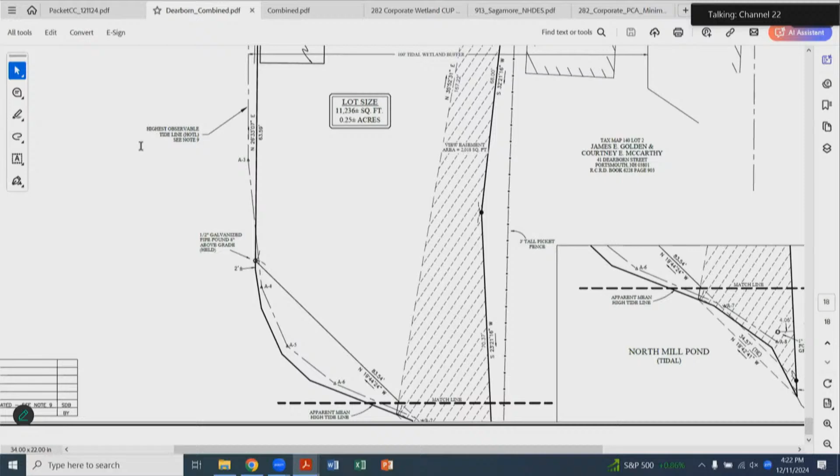The alteration of the natural vegetative state or managed woodland will only occur to the extent necessary to achieve construction goals. We're not proposing any alteration to the natural vegetative state. There won't be any tree cutting.

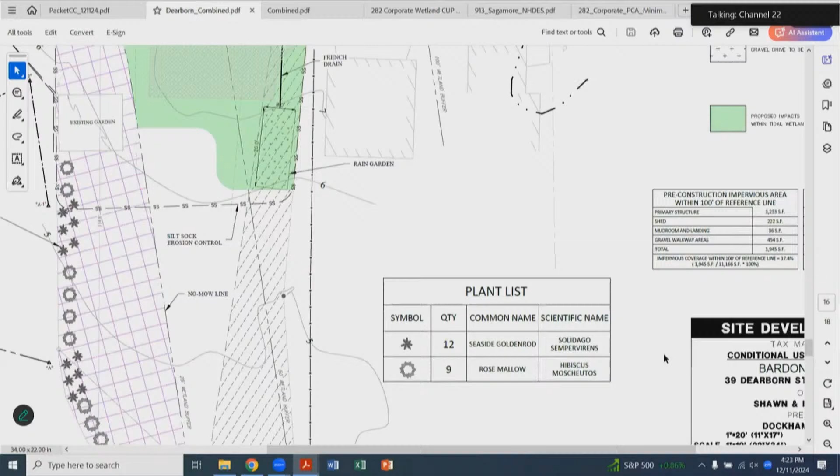And we also, from the last meeting, plan to increase the width of the natural vegetated buffer adjacent to the resource. So the property owner has been amenable to providing a no-mow zone in the 25-foot setback to ensure that native vegetation can grow back and provide some sort of buffer from both stormwater and on the lot. And then this proposal is the alternative with the least adverse impacts to areas and environments under jurisdiction of this section.

This project is the least impacting practical alternative, and we are trying to make the property better environmentally, while also allowing the property owner to add this addition on to enjoy his property. Any area within the vegetated buffer strip will be returned to a natural state to the extent feasible.

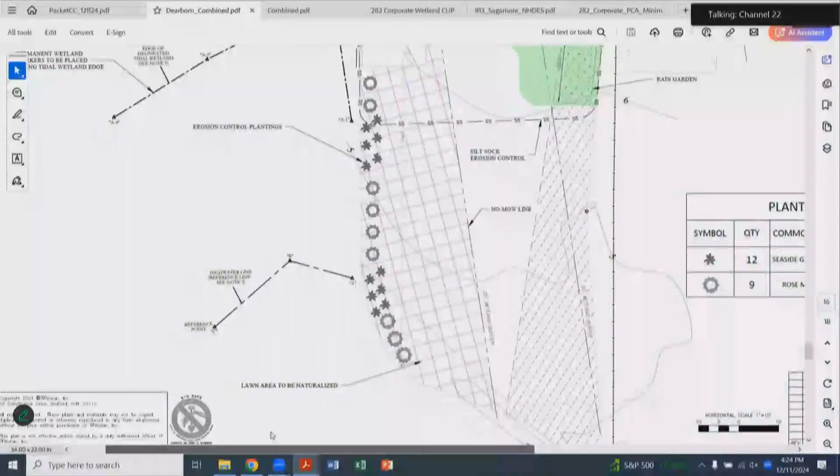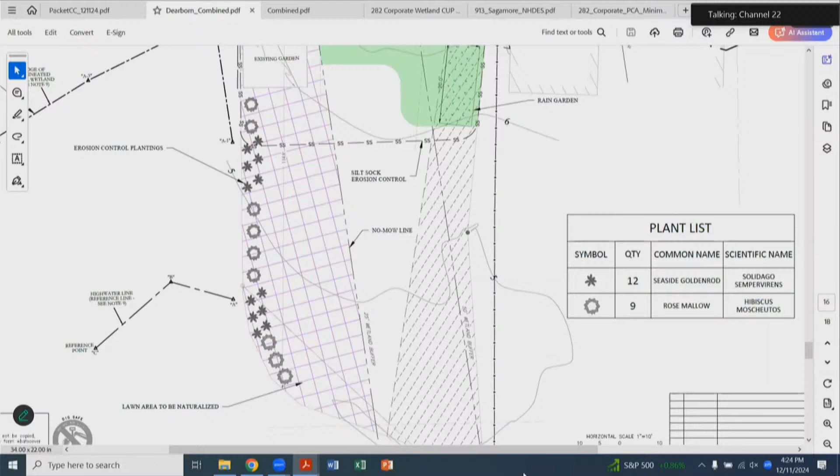So impacted areas within the vegetated buffer strip will be reseeded with a native conservation seed mix, and the area currently existing as lawn, as I mentioned before, will be allowed to return, as well as these plantings on the plan that we are proposing to facilitate an expedited regrowth of that natural buffer area. And I am happy to answer any questions that you may have on the project.

Great, thank you very much. Questions from the commissioners? I can start. The pervious turf stone, I think it said it was a cement grid, so just to confirm, there's no plastic with that whole setup? No, there's no plastic underneath or anything. We're able to do that just by laying it right on the grade. Okay, and the grid is the concrete grid? Yep. Great, thank you.

Another question? We may have covered this before, but the area to the left of the house, existing building, has, I think it was maybe plastic that was put down, or because of the runoff from the roof? Yes, I remember that from the site walk. I'm not sure if that has been removed at this point in time, but I can double check with the property owner and make sure that that is removed as a condition of this. Okay, thank you.

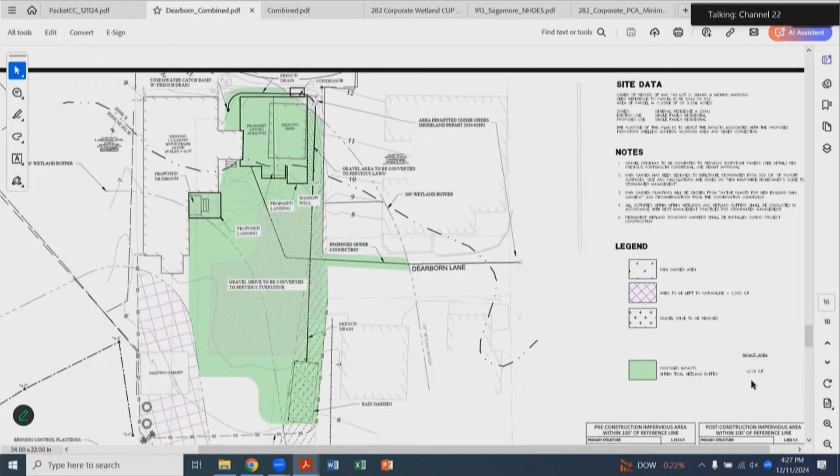So the increase in impervious area from the home addition will be about 460 square feet. So we ensured that this rain garden would be able to infiltrate that amount that is added on by having this home addition. But it won't capture all of the water that would run off of the roof, just that extra square footage? Yes, basically the extra square footage, and where the catch basin is located on the back of the property will also capture some from the existing home.

And then converting the driveway to be those pervious turf stones will also aid in some of the sheet flow, just as a result of runoff on the property, as well as allowing the buffer strip to revegetate, prevent some of those pollutants from entering the resource.

Okay. So you don't actually know quite where the water table is, or how quickly it would percolate there naturally at this point. Did I hear that correctly? Yeah, not how fast it would percolate, but we made sure that, especially on the detail, it shows that we would dig out a little extra in order to put an engineered soil mix that will have better drainage than the clay that we planned for.

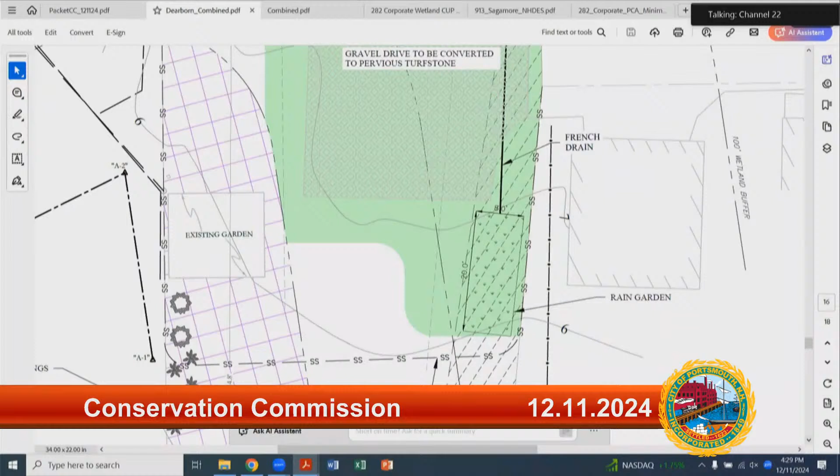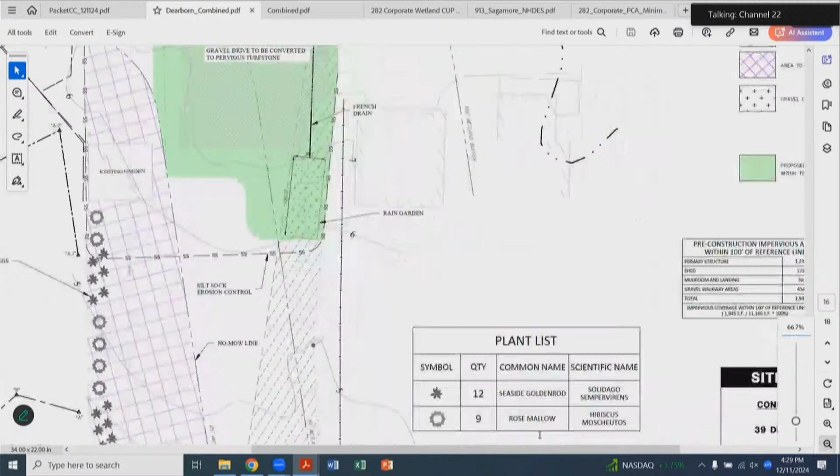Okay. And there's no overflow for that rain garden? It'll just kind of go into the lawn area if it overtops? Yeah, so on the rain garden detail, on the southern end of the property here, there will be a slight little dip in the berm acting as an outflow structure. So if it fills up and can't infiltrate for a very heavy storm, then it will be just flowing into the

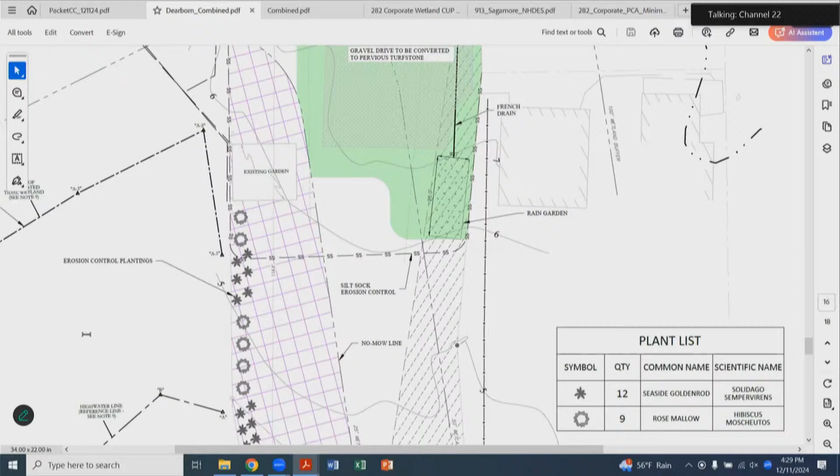lawn area. Okay. So there's a little bit of a lip around it? Yep. It will essentially just be a depression in the ground that's dug out, and then plantings. There's a great guide online about rain garden plantings, and we're happy to take recommendations as well if the commission has any for the rain garden, and they'll be planted in this depression. Water will flow in from either runoff or the French drain and just percolate down in the soil.

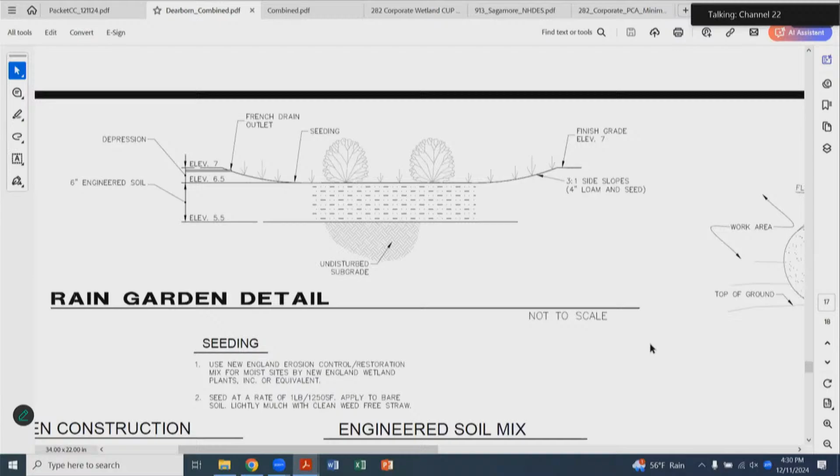If it is a really heavy storm, like I said, on the other end, there will be a slight little outlet depression in the berm, which will allow it to outflow, so it doesn't flood and completely rip up the rain garden. Yep, it'll go in the right direction too, away from the house and driveway. Okay. In terms of plantings, the only thing I might offer is to think about plants that have a little bit of salt tolerance. It could get a little brackish over time. Absolutely.

To piggyback on the plantings, the plan that we had in our packet versus this plan that you gave us, you changed the 25-foot wetland buffer line to have it wrap around, instead of the one in our packet that just went straight down. Are you also going to make the plantings go around the curve there? Because before they were along the entire stretch of wetland buffer on the edge, but now that you've extended that and curved it around, are we going to continue those plantings? Yeah, that's something that we can definitely consider.

I did want to mention as well, the reason that those buffer areas look slightly shifted on the plan that I handed out today was because the land surveyor we've been working with reached out to me recently when I requested a stamped wetland plan, per the last meeting. The commission wanted to see a wetland stamp and the date of delineation. The surveyor said the plan I'd been working with since September was actually the wrong line, so he sent an updated version which caused the shift in the buffer areas. The project remained largely the same, just shifted slightly based on the most current delineation.

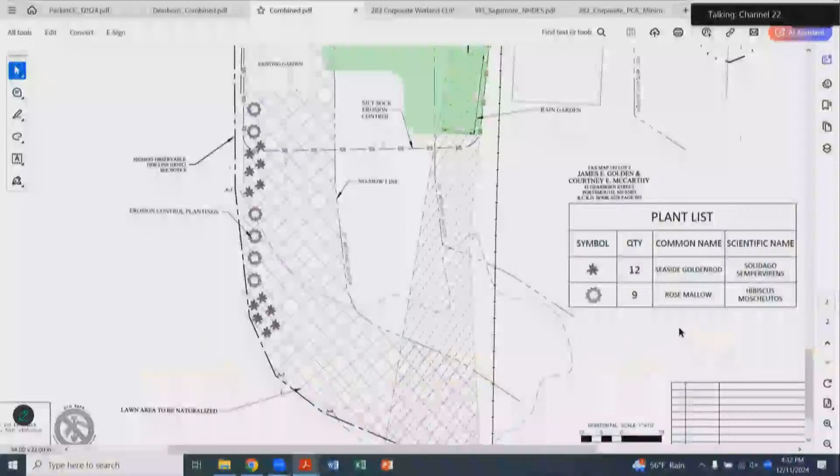Great, thank you. So the number of plantings remains the same? Well, that was something that we had agreed with the property owner on, but that's subject to change. I'm sure he'd be willing to add more plantings and develop a more extensive living shoreline plan. Yeah, on the original plan, the 9 hibiscus were shown, and they're not. So I'm just making sure that the number of plants remains the same. Yes, the number of plants is remaining the same.

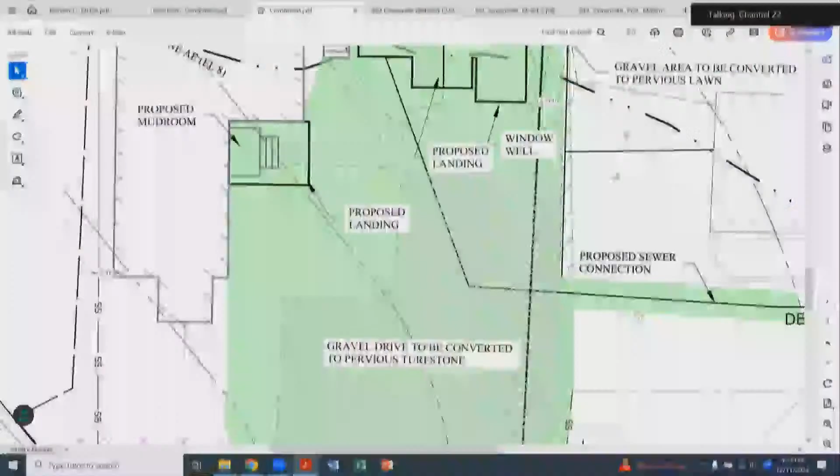Question about the French drain. It looks like the base for the driveway intersects the gravel for the French drain. Could you describe whether or not that's an issue? The base, sorry, could you explain that again? It looks like the area of the driveway overlaps the line of the French drain, and there's compacted base below that material you're using on the driveway. So I wondered if that has an impact on the French drain. Yeah, the French drain will be installed before the driveway is converted to pervious, so it'll run underneath the turf stone pavers.

I guess my question is that there's some amount of compacted base that runs over. It looks like they would intersect, and it's two different materials with different drainage. Oh, okay, I see what you're saying. So that area that will intersect the French drain, we can determine how deep that goes on the detail. The depth can vary, and we can ensure that those areas don't interact.

Okay. The reason for the question was, would you be creating some kind of stop in the flow there with the compacted base? But it doesn't sound like it. Yeah, no, we would make sure that it is able to work efficiently and not impede the ability to shuttle that stormwater into the rain garden. Okay, thanks.

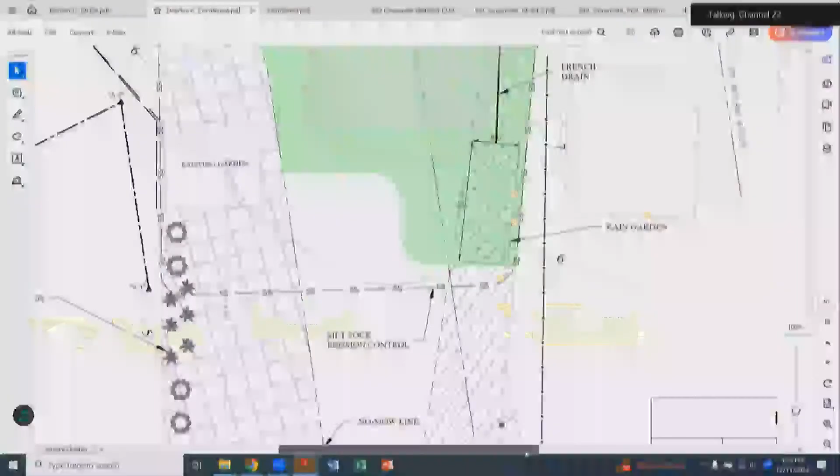Question about your silt sock placement. Yep. It looks like it cuts right across the property, going right into the 25-foot buffer, and I was wondering if it could just hug the 25-foot buffer. It shows that it's going right across, but instead could it go up and protect that 25-foot buffer above it? Yeah, absolutely. We can definitely make that edit to make sure that it protects the whole 25-foot buffer. Okay, thank you.

Then I had one or two more questions. What's the elevation of the basement for the new structure? Or is there going to be a basement? I believe there will be a basement. I believe I added the architectural plans. I'm not sure that this has an elevation on it, but is this for the building permit for the FEMA flood zone?

Well, yeah, and if it doesn't meet what it needs to, and you have to change the plans, that could potentially impact what you have to do and what we have purview over, so that's why I was asking. I am not entirely sure on the elevation of the new basement. I can reach out to the contractor and make sure. It has to be, is it 10 feet? Yep, eight plus two. Base flood elevation there is 8 feet, so any ground floor would have to start at 10 feet.

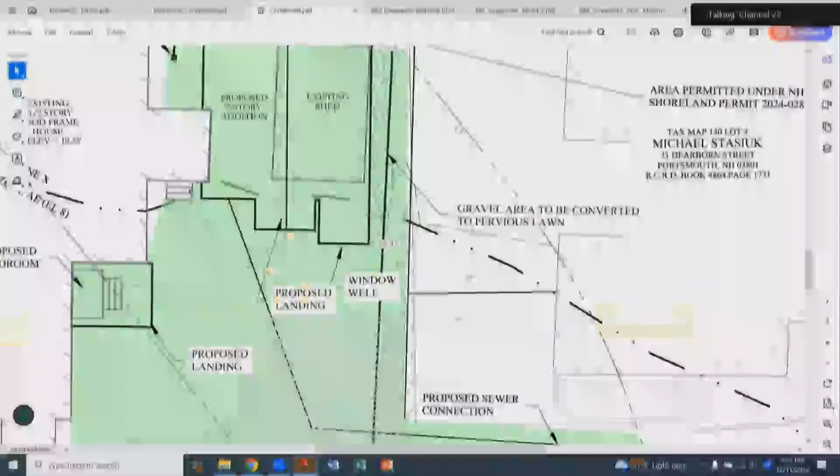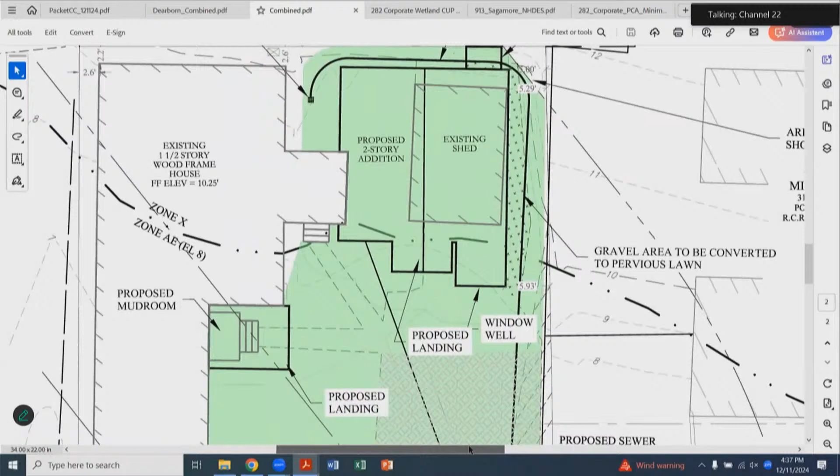I actually just saw in the plans that there were some elevations or topo drawn in here. So it looks like it's really close to 10 feet at ground level right there where the addition's going in, but if a basement is gonna be dug below that, that would come up against the floodplain ordinance for Portsmouth, so there would be some tricky issues with what could go in that basement or if the basement could be built at all. And that is for flood zone AE. Yes, I think that's A, or that's X. So from this survey, I guess the foundation would be mostly in flood zone X.

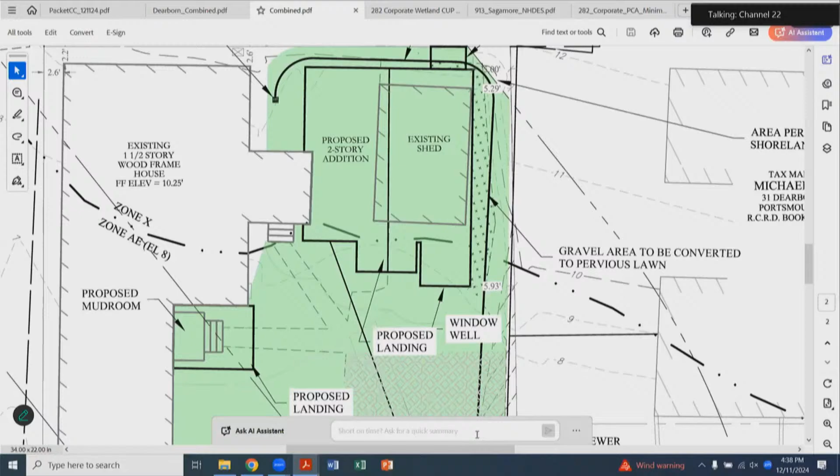There was a discussion about it in the first meeting or at the actual site, because there were comments about sump pumps going on permanently and not managing to empty the water. Yeah, I think our big concern is just that before you get any final planning board approvals, you have the final design figured out and you've talked with staff to determine what the elevation has to be at. Because if it turns out that you'll need to redesign the whole basement or get rid of it, you might have to go back to certain boards to readjust plans. So we don't want you to have to go back all the way to the beginning.

One more question. Do you have where you're planning to put the buffer boundary markers anywhere on your plans? I added a note that said that the wetland boundary markers will be added, I think just where the delineation occurred. The 25-foot buffer? It's on the wetland edge right now. Oh, it's on the wetland edge right now? Yeah. For each of the buffers, add markers for those during construction? I mean, how are you going to make sure that the no-mow line stays where it is?

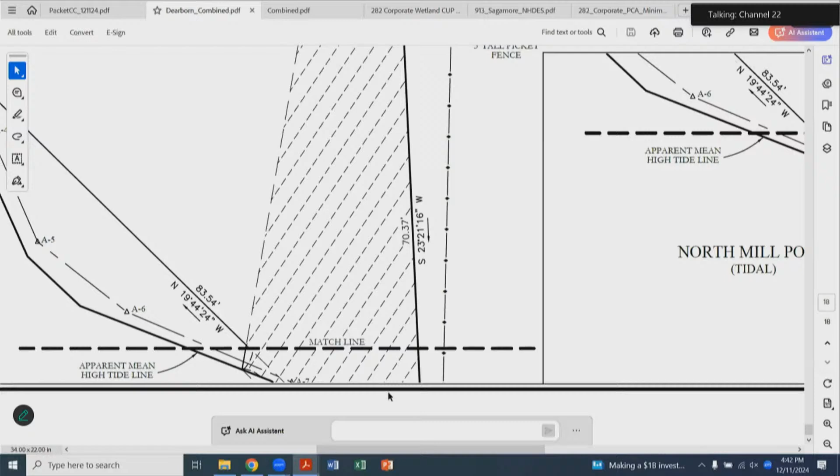Just a question about the view shed, because I'm not that familiar with how those are managed. You don't anticipate any concerns with letting the grass grow tall, maybe even letting a few small bushes grow up in that buffer that also overlaps with the view shed? Yeah, I think that view easement, I believe on the boundary plan, there's a height set. It's mainly for actual construction, like building a house in there. They got approval for the addition being a certain height, to ensure the abutting property doesn't have to deal with someone putting up a very tall house and then they can't enjoy their property.

Okay. There's also a note on the plan that said it can't be vehicle storage or parking. But it doesn't say anything in the note about woody plants, which is great. Maybe a big tree might be an issue. Right. Makes sense, just to make sure. Are we ready for a motion? Okay. Go ahead, Barbara.

I'll make a recommendation to approve 39 Dearborn Street with some stipulations. I might need help on this, but to remove the plastic, I think on the northwest side of the house, and to provide the basement elevation to meet the Portsmouth floodplain ordinance requirement, and to include it in the planning board application. And to put the wetland buffer boundary markers, possibly in addition to boulders or other markers, at the no-mow line at the 25-foot buffer.

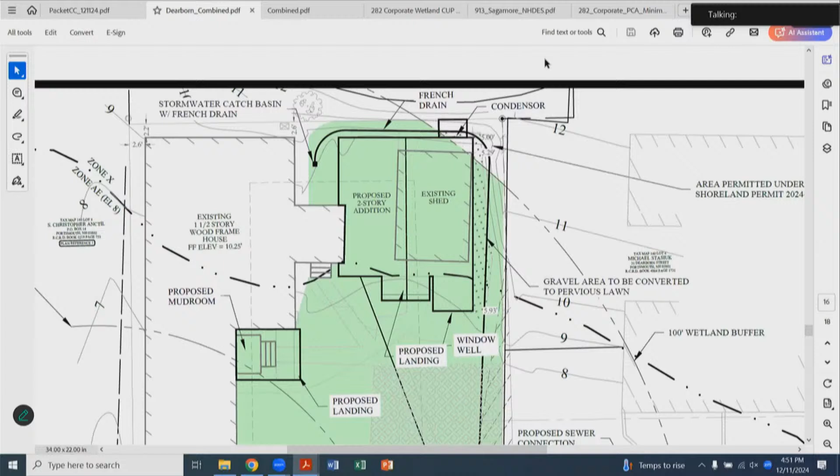So there won't be a basement, because a basement is defined as a space that becomes the new floor elevation. There could be a crawl space, though, and a crawl space is defined as anything that is 4 feet or less from first floor to lower floor. So that is where they might head if they're going to comply. So no basement, potentially a crawl space. Okay. But they could propose to fill in front of the building to create a change to the flood zone line, but that process is another option, and it's not before you.

Okay. Well, there's the FEMA rules and then there's the city's ordinance, which are two separate things, right? Right, we just add on that extra 2 feet. So where it's 8 over there, it'll be 10 feet where the first floor, the ground level, will have to start. And that probably just goes for the new part of the building, not the old part? Right, or a substantial renovation or reconstruction.

If it's more than 40% of the cost of the building, then that's considered a substantial reconstruction or addition. So the addition would have to be above what the existing home already was. But they wouldn't be expected to elevate the older part of the existing home? No. Unless they were doing substantial construction on that portion. New construction has to comply. Renovations have a threshold, like you said, 40% of value. Which this might be, but.

And just to add a note, the footprint closer to the edge of the property where the proposed landing and window well are will not be part of the foundation. So if there were going to be fill, it would just be where that little jut out is of the existing structure, in the areas that we already have denoted as impacts, just where machinery will go in order to construct the addition.

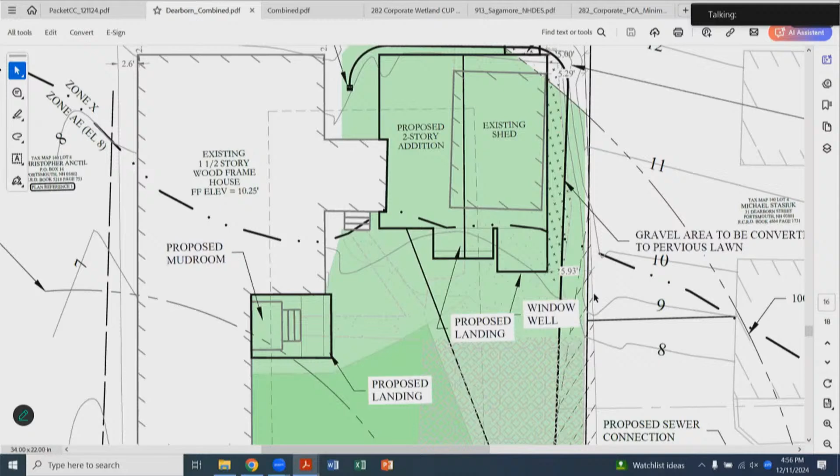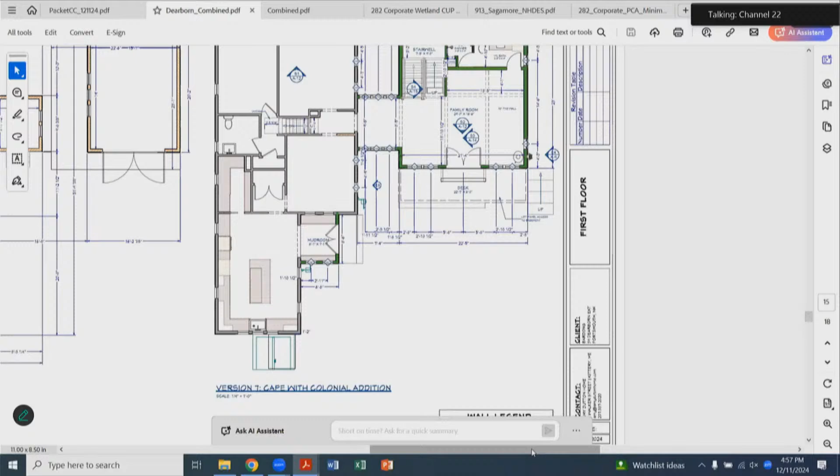So I should have asked this before, but the window well is then indicating that there is a window in the foundation to the basement? Is that correct? Why would you need a window well if there was no window at that level? I think when we were on the site walk, the property owner mentioned that the window well was like a bulkhead. Yeah, I believe on the foundation plan it's shown. That's the first floor plan. There's one that is the foundation plan. Yes, so it is actually a bulkhead.

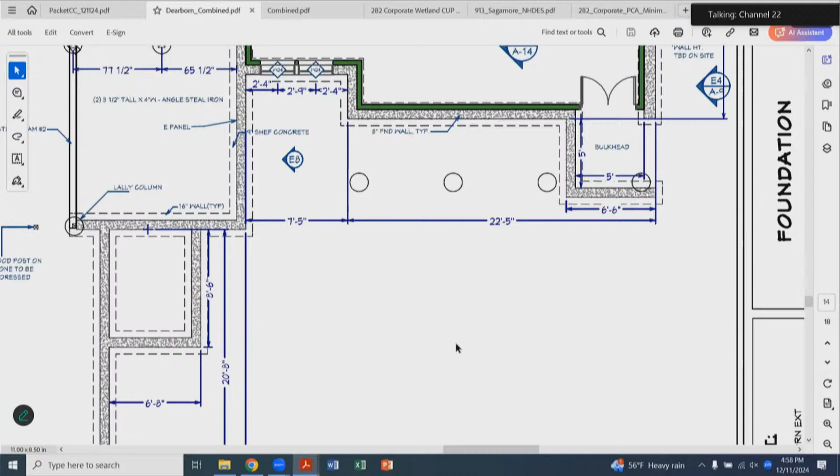Sorry, I misspoke. Just the landing area and the bulkhead will be in that flood zone X or AE, and those areas would be the only areas that would need a bit of fill to make them compliant with the flood zone regulations. So there's going to be a basement, that's showing water table, stairs, and a bulkhead. AE will have to comply with the 10 feet.

So if there is a basement proposed, it would have to not have any utilities, or there are a lot of restrictions on what could be in the basement, but I think that's something we'll solve before the building permit process. It would be good to get that floodplain elevation certificate from FEMA. Yeah. Okay, we have that as a stipulation already with figuring out the elevations. Sure. Okay, are we ready for a motion?

Oops, a vote, I meant a vote. We've already done a motion. And Talia, you're voting. I'm voting. Okay, all in favor? Opposed? Great. Okay. Thank you very much. Thank you.

Next on the agenda, we have the conditional use permit for the Pease wetland at 282 Corporate Drive, and also a state wetland bureau application. Do we need to make a motion to hear them together? I think so, just because they're separated on the agenda. Okay. Does someone want to make a motion to hear those, the conditional use and the state permit together? And I guess we'll vote on them separately, but right in a row. Yeah, I'll make a motion that we examine both those permits together. Second? I'll second. Okay. All in favor?

Okay, great. Hi, thank you, Madam Chair, members of the commission, John Chagnon from Haley Ward, representing Port City Air and Great Circle Catering with this application. The project timeline, just for reference, is that we started in June with a concept approval from Pease Development Authority. In October and November, we worked with the Portsmouth Technical Advisory Committee to perfect the site plan elements and the technical elements of the site plan. And then on December 4th, you folks had a site walk at the site to review the proposals that you have before you. There's two items, a Pease conditional use permit and a wetland bureau minimum impact permit application.

So first I'm going to talk about the wetland conditional use permit. And that conditional use permit, since it is under Pease Development Authority area, it is going to be looked at under their ordinance section in Article 304-A.08, use of the wetlands requiring a conditional use permit. Section 304A.079 does allow drainage ways and stormwater treatment structures to be constructed as allowed in the buffer. This is the Pease rules. But in this particular application, the removal of pavement and concrete pads, removing impervious surfaces out of the buffer, qualifies for the requirement that we obtain a Pease wetland conditional use permit.

So according to Pease Development Authority ordinances, we have 5 criteria to meet. The first is that the land is reasonably suited to the use. We propose that this proposal before you is to remove existing non-conforming site impervious surface improvements and create stormwater treatment enhancements. And given that the existing lot contains an existing commercial site development which has been there for some time, we would submit that the land is reasonably suited to the revised use, given the proposed alterations.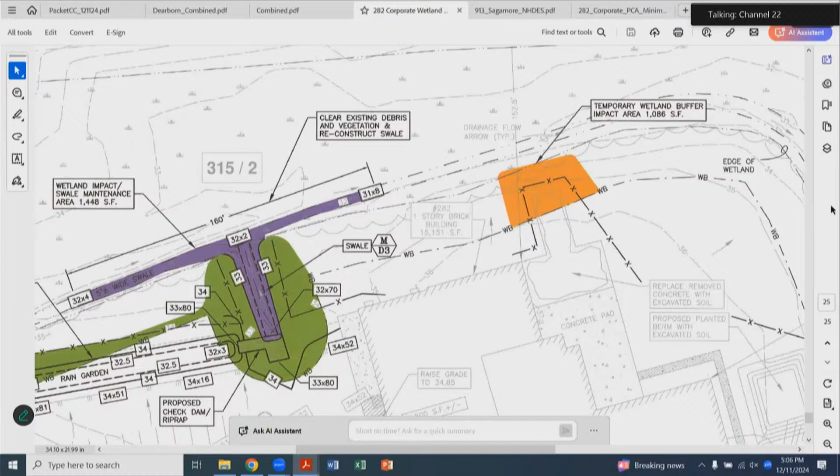And the other thing that we are asking for the board to recommend is a recommendation to the Department of Environmental Services regarding the minimum impact expedited permit. And we've submitted that application as a part of the record. Hopefully you're taking a look at it. And my understanding of the process is if you would vote today to sign the application, I have a signature page that we would bring up, and then we would come back with the 4 or 5 complete packets with the signature, because we need to get the city clerk to sign them all.

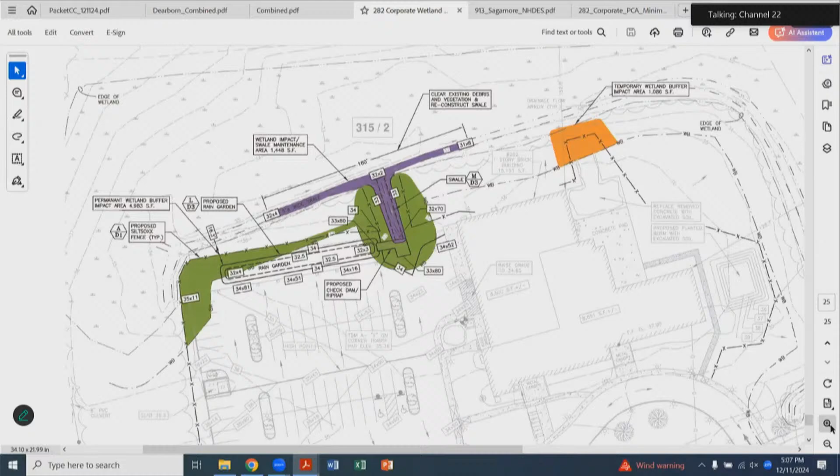So this project involves, in the area in purple on the plan, work in the wetland. The swale and the old swale were delineated as wetland areas, so the reconstruction of the swale exiting the parking lot, which is facing up and down on this sketch, and then the excavation of the swale going left and right, which is needed to provide proper drainage for this existing parking lot, involves impacts into the wetland resource.

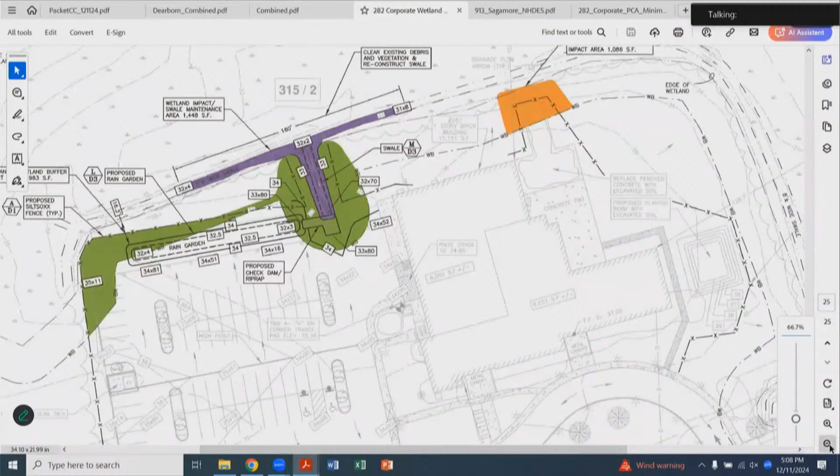The square footage is 1,448 square feet, and the material consists of road sand and other fines that have been washed into the swale since the last maintenance. There are some invasive species which will be removed. We have erosion and sediment control notes and general condition notes in the plan set, and maintenance and protection notes, and detail C3 on sheet C3. Dewatering of the dredge material is not anticipated or proposed.

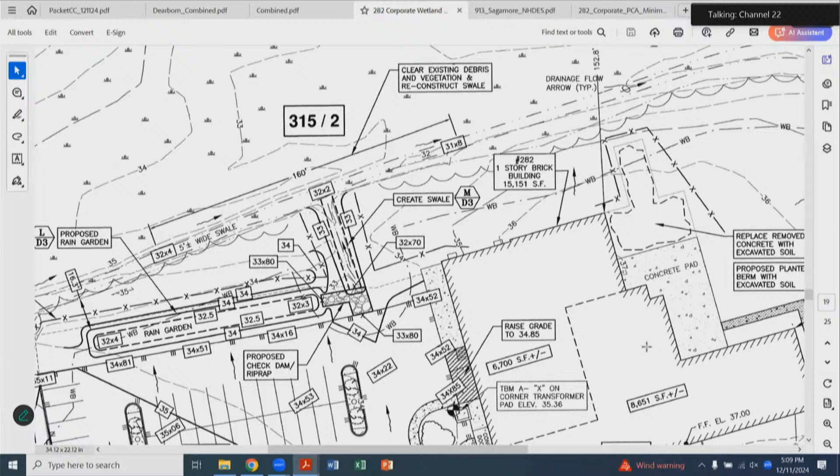If needed, dredge material will be stockpiled in an upland area protected by temporary erosion and sediment control and allowed to drain freely. We do have notes, and we talked about at the site walk, the reuse of that material as it has to stay on site in a planted berm area to the right of the building as you face it from the street. Additionally, that material will be, as needed if required, capped.

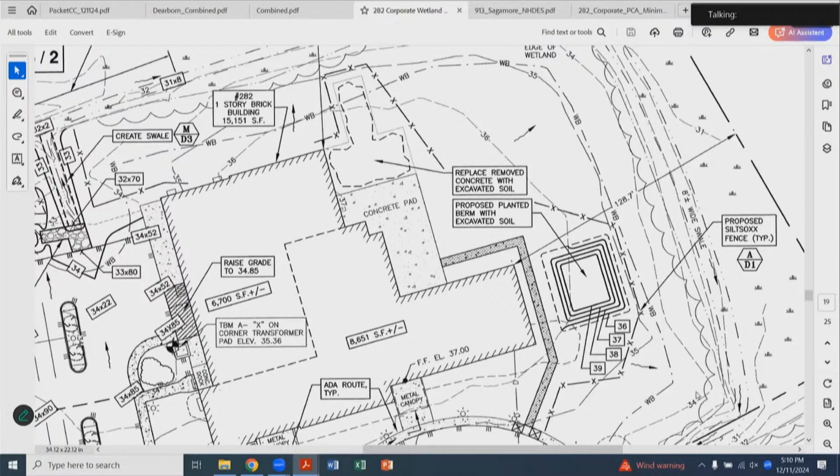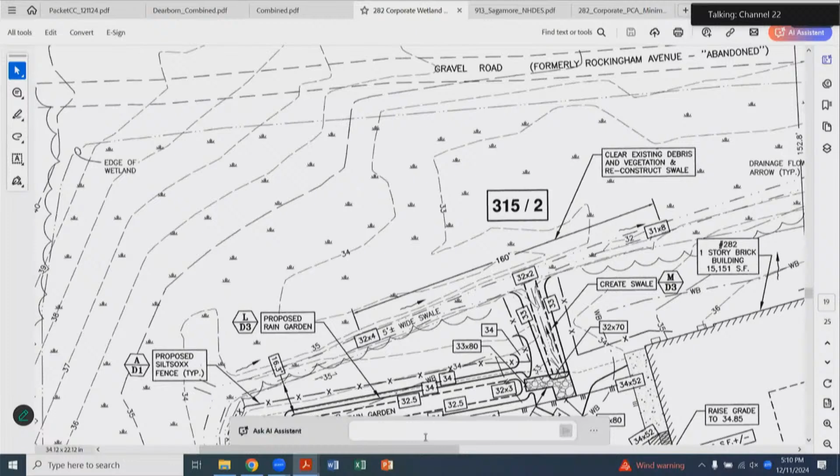Stormwater drains from the parking lot, and the contamination, as controlled by the Pease Development Authority, may contain PFAS. It's not going to be tested, but since that is presumed, the spoil material needs to stay on the site at the moment. So the maintenance does not involve in-water work and will utilize temporary erosion and sediment controls. Therefore, specific project timing is not necessary to minimize impacts to the aquatic resource. That is the reading from the minimum impact expedited permit application.

The commission at the site walk did identify the fact that the existing lawn area does protrude into the 25-foot wetland buffer, and I spoke to Port City Air, and they are very much in favor of placing 25-foot buffer markers along that 25-foot edge, and then letting the area beyond that revegetate to a natural state, so they would not mow that anymore.

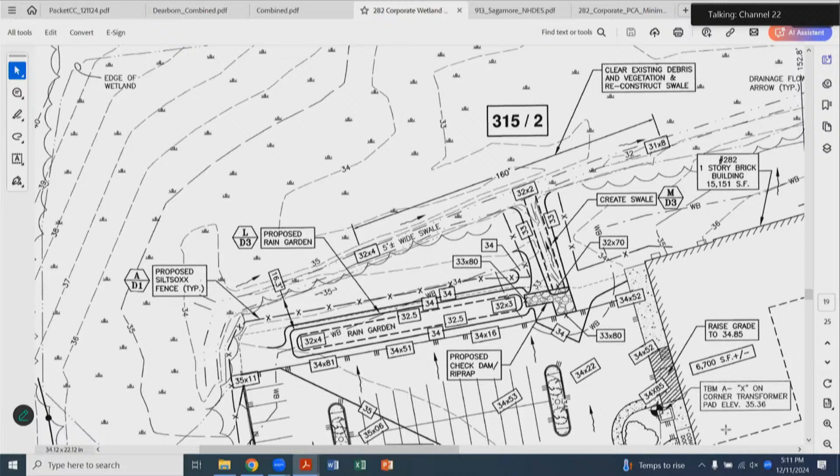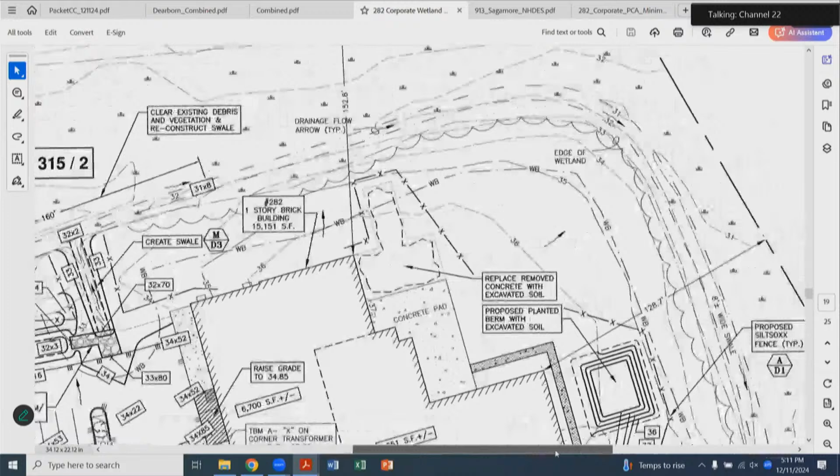So those buffer flags would start at the building here on the right side of the page, because obviously the work that we're doing for the rain garden, et cetera, would not have a wetland buffer marker, but going from the left edge of the building and around to the front where the 25-foot setback is, we would propose to place wetland buffer boundary markers and not maintain the area beyond that, letting it grow back to natural vegetation. If you have any questions, be glad to answer them.

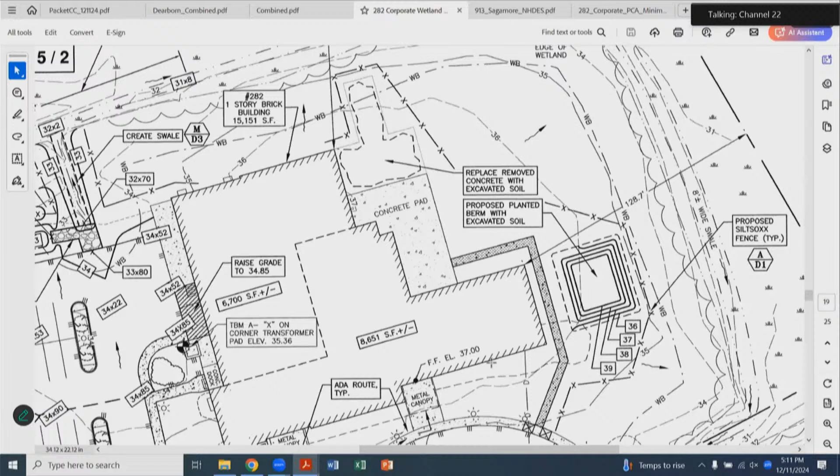And I had, so beyond the rain garden, where you're removing some pavement, is anything gonna be planted there? For where pavement's been removed, but where the rain garden is not going? I know there's a little bit of area.

We could, I don't know, I would let that naturally vegetate back. The rain garden berm needs to be maintained, so woody vegetation doesn't grow into it. So maybe just like a conservation mix put down and then just let it kind of go? Yeah, we could also note that.

And then on that point of the rain garden, you said that area, there's a lot of filling in by sanding and salting probably. Are you concerned about that impacting the rain garden going forward with whatever maintenance they do for storms on that pavement? Sure. So as a part of the ongoing and long-term rain garden maintenance, you may have to occasionally remove built up sediment that builds up in the rain garden.

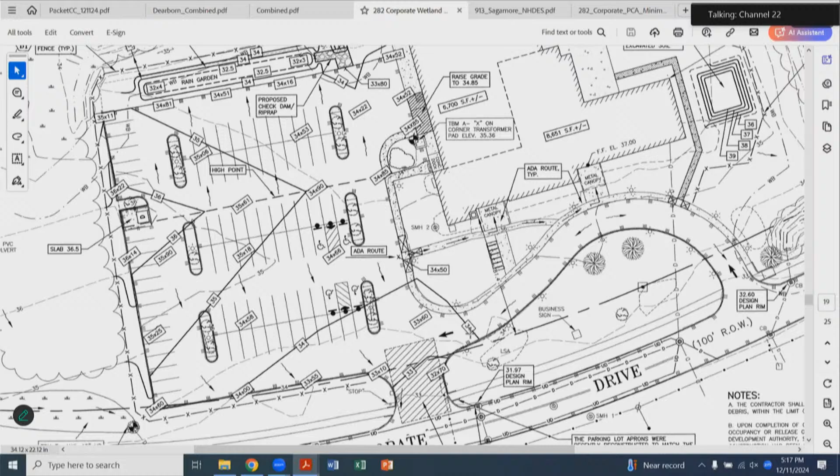So as follow-up to that, this is eventually draining to Hodgson Brook, which is impaired for chloride. So you probably want to check on this with PDA, but they do have a management plan for chloride reduction, which includes using the Green SnowPro certification or practices. I think it's certified winter maintenance.

In addition to that, when you're talking about the rain garden getting sand and salt from the area, is to have a schedule for sweeping the parking lot in the spring, like early April, but preferably a couple of times during the year, but definitely in the spring after the applications have been done. And that would help manage that.

I have another question about the maintenance plan. Somewhere in the proposal, it talks about bittersweet as being sort of your focus of invasive species to remove. Correct. And the maintenance plan doesn't really reference that at all. It references keeping track of invasives and keeping them from coming back, but we could add in specifics. Yeah, because it's a little different than the purple loosestrife or the Phragmites, so maybe a little more specifics on that, coming back and cutting again and checking for it. Because that would be awesome to get rid of those if you can. Yeah, I mean, you can cut and dab, I think.

So when we were at the site, you mentioned that there would be tree removal, those large trees going down. There were 2 large trees going through the swale. Right, the trees in the swale, yeah. And then there's been so much growing back that there's an awful lot of other trees on either side of that, and you kind of insinuated that there would have to be some clearing there. For the side slopes of the swale, yes. Maintain. I think I misspoke, though.

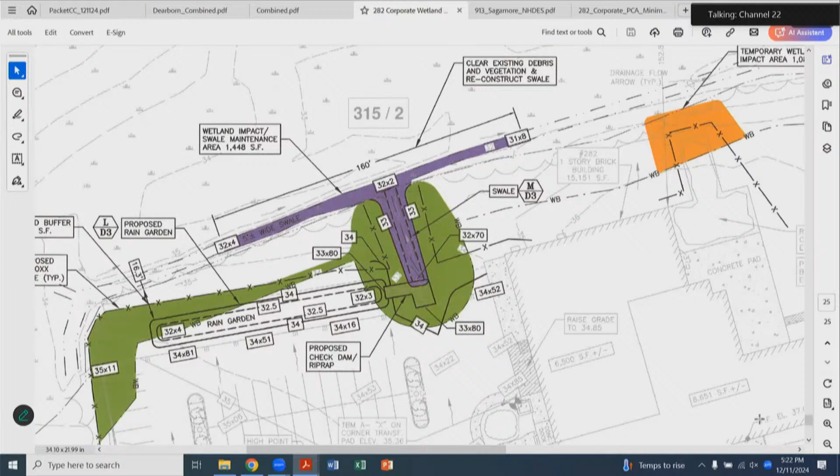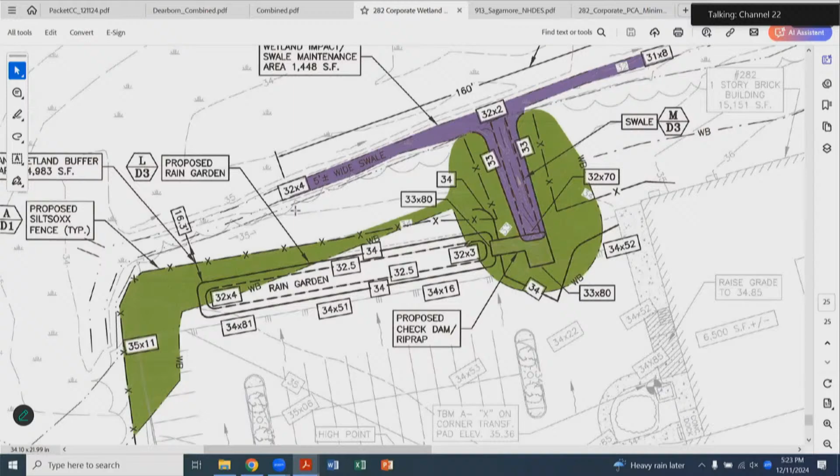Going to the left, the tree line is outside of the influence of where we're going to put the rain garden. You misspoke on that? When we were at the meeting, I thought there'd be more tree cutting going to the left, beyond the swale, but I don't think there is, because if you look at where the tree line is shown, we're not impacting the tree line. Okay, so to the left, you really are not cutting any trees? Right. So can you include that in the plan? No cut area, no tree cutting beyond a certain point, whatever.

I know you're going to have to take out invasives, but there can be such a disconnect if it's not in the plan. So I understand, the note on the plan does say that the invasive removal has to follow the DES standards, so I would imagine somewhere in there it says just take the invasives and don't take other trees. Yeah, but more importantly, just show where that area is on the plan, and the area where you are removing those invasives, specifically calling it out on the plan.

Because once the trees, if somebody comes in and cuts more, then there's no going back. And it's great that you're leaving it, because it has grown up. Any more questions? No, sorry. No, you're good. Okay, who wants to try the motion? We'll help you with the stipulations. I can try.

And I guess what I'm thinking is, if it's possible, if we approve this, you could just provide the plans to Kate or whatever you have. Yeah, sort of a condition. Are you pulling up some plans, Kate? This is from the planning board from November, where it was approved. So the proposed northern red oak should be at least 2-inch caliper sizing. This has been noted in the buffer planting schedule on sheet C104. So bottom right, yeah, that's the buffer planting schedule in the upper left. And if you raise it up, I think you see 2 inches in the oak caliper there.

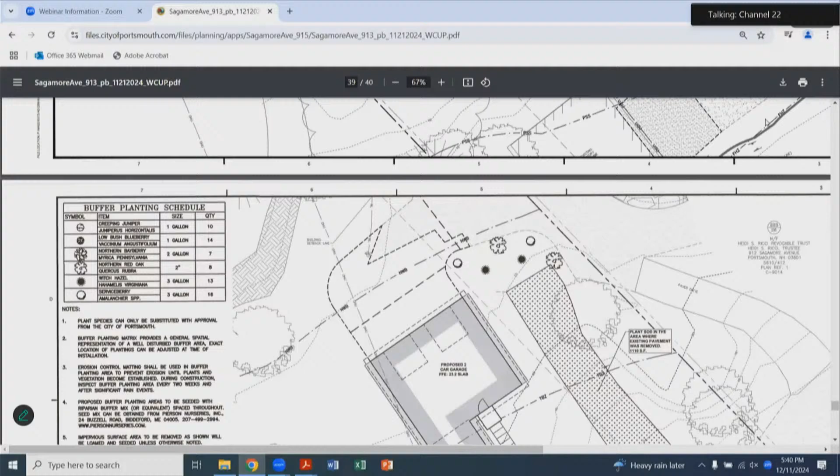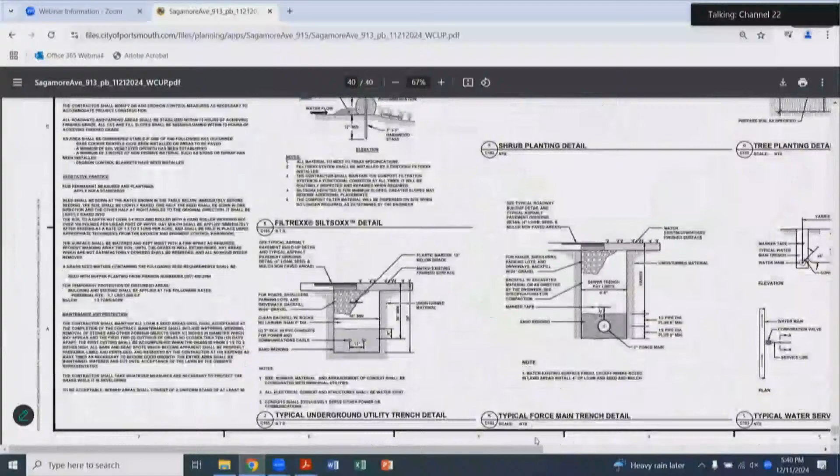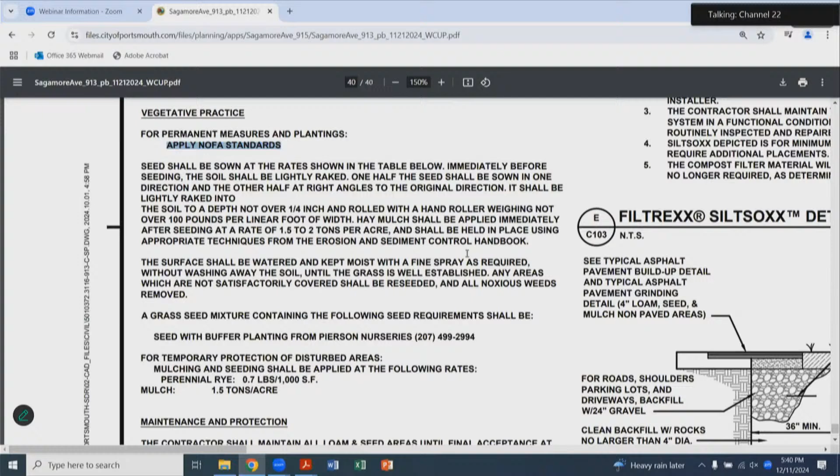So we changed that. And then as far as the NOFA standards, that was noted in the vegetative practice section on sheet C501, which is at the end of the set, and then, yep, to the left there. I think it's in the top part, vegetative practice. Yeah, there you go, NOFA standards. So those are the only changes. And then, do we have something showing where the boundary markers are gonna be placed? Is that on one of the plans too?

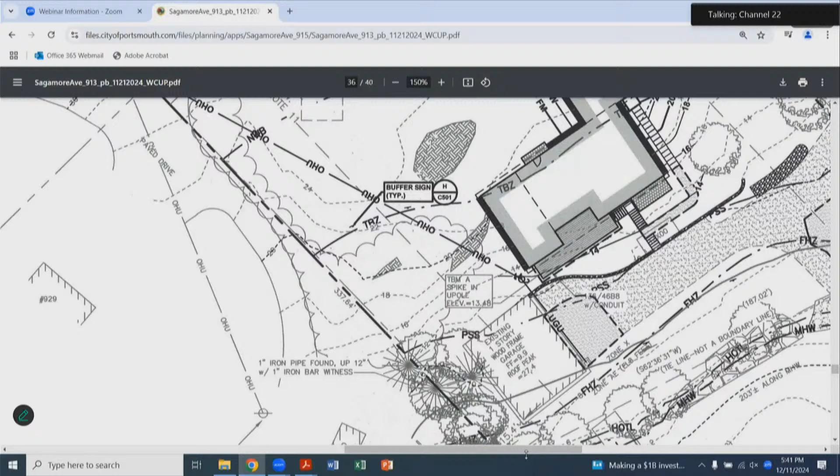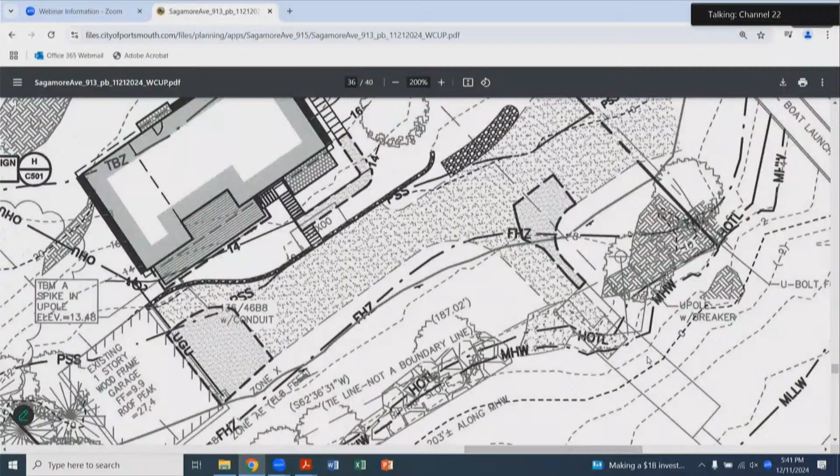Yes, so the boundary markers are on two plans. C100, existing conditions and demolition plan shows the markers, let's see. Oh, no, maybe it's the overall site plan. Yeah, the overall site plan, C101, shows the markers that are out of view on the other sheet. Right there in the middle where it says buffer sign, typical. So there's one over there for the 100-foot. And then because of the development, you go to the landscape plan, I believe, and that shows the other markers.

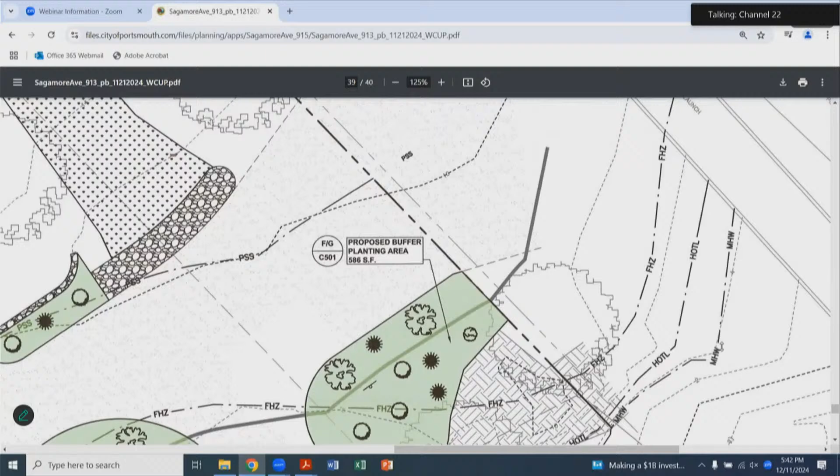So there's 3 that will be placed at the edge of the newly planted buffer. Okay, I see. And they follow that one every 50-foot rule. So there's one there. Okay, thank you, that's very helpful. All right, thank you.

Any other questions? In the very beginning, did you mention that the stipulation of having the buffer markers would not be included? Or did I misinterpret what you said? So your recommendation is sent to the planning board, and between your meeting and submitting for planning board, we usually show how we would meet your recommendations, and we did. The planning board kept as a condition that the buffer markers would be placed. Oh, okay, I just heard you wrong. Thank you. So the planning board approval is subject to putting the buffer markers in. You good? Okay, you ready to make a motion?

This is for a state permit, if that helps anybody. State Wetland Bureau permit. We're recommending approval. Take it away. I recommend approval for the state wetland permit for 913 Sagamore. Excellent. Second. Okay, any discussion? I think we're good. All in favor? Opposed? Great, thank you.